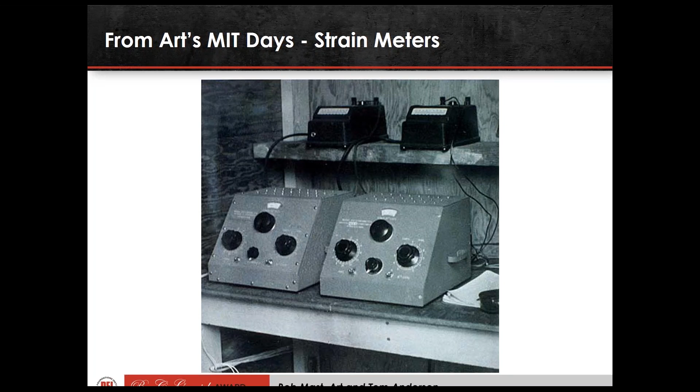In the late 40s, there was a project in Philadelphia for a new bridge overcrossing, and one of the firms that bid on it, Preload out of the UK, bid a pre-stressed concrete bridge. The City of Philadelphia said, that's not in the code, we don't know how that works, so you've got to do a full-scale test. And so Art was hired to do the instrumentation of this.

Many of the famous names, T.Y. Lin and others, in pre-stressed concrete were involved in this test. It was successful, showed what you could carry with pre-stressed girders. And today when you drive around Washington State, you see many, many of these.

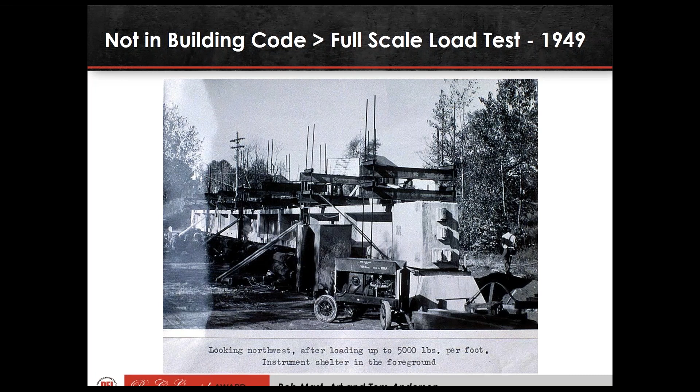But this was Art's first encounter with pre-stressed concrete, and he came back to Washington and started a firm. He started Concrete Engineering Company with his brother Tom in 1951, down on the Tacoma Tide Flats.

Interestingly, they were going to build a plant in Seattle. Seattle said, well, it's not in the building code, so you can't build that here. And so Tacoma said, well, you guys are the engineers, you do it. And so they founded Concrete Engineering Company, later known today as Concrete Technology Corporation.

But a year later, they spun off an engineering company, Anderson and Anderson. A few years later, Hal Birkeland, another one of the giant principals in this, joined the consultancy, and then Bob Mast joined in 1959. They had enough letters for a name, with two vowels that really worked well—ABAM Engineers.

From there, as they were applying this new material, Art was always the showman. When people would ask if you could do this, he'd say, well, let's ask the beam. Let's ask the concrete. So he'd build these things in the plant, instrument them, and show that indeed they would work.

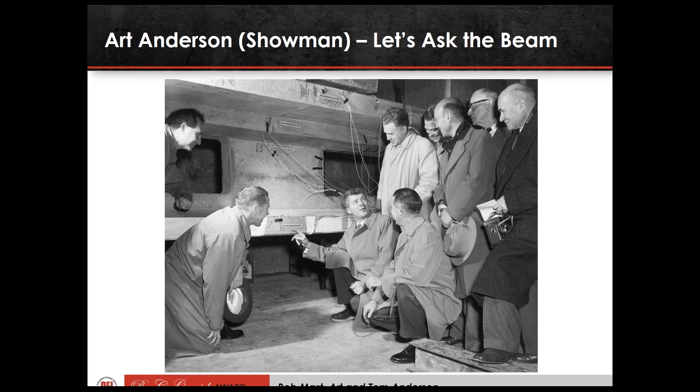A number of the innovations you've seen—this is a little broader than just marine foundations—include wide flange beams that are the WashDOT standard shapes now, and many other DOTs have adopted them, developed by these guys. The double T's, the deck bulb T's...

And Bob mentioned curved post-tension beams—I'll talk a little bit more about that in just a minute. Piles, pre-stressed concrete piles, hollow piles, and even an innovative technique, as Bob mentioned, for fabricating those.

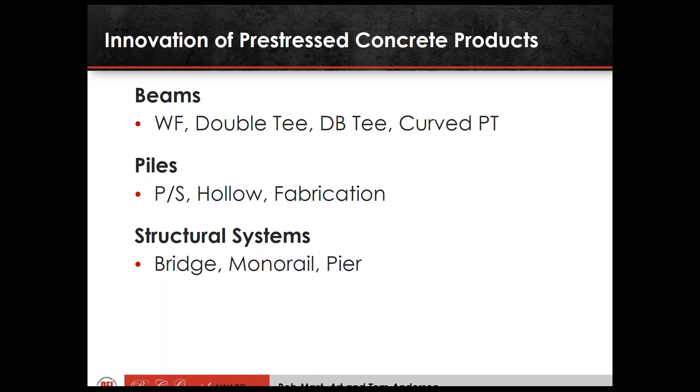Importantly, these guys were focused on the entire system. I think that's something that really bears a lot of credit—looking at the entire system of how this stuff works, not just the foundation, not just the substructure, not just the superstructure.

So they started by building a plant. They built their own pre-stressed building—this is a pre-stressed concrete moment frame, basically. You look at the cars, I think it's early 1970s, but the plant was built in '52. The building's still there, and many of the products you might know around Washington State were fabricated there.

One of the early things they did was the deck bulb T, came up with that concept. These were fabricated with a curb and the diaphragms all included, as you can see here. Some of the early uses of pre-stressed beams were on logging roads in the Cascades. Actually, these beams were quite a bit less valuable than large diameter old growth logs, so the Forest Service and timber companies were very interested in using these.

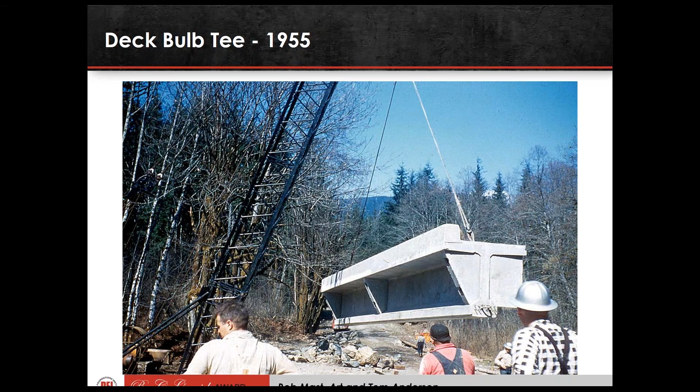Then enter pre-stressed concrete piling. This was an idea certainly relevant here in terms of marine foundations. A lot of people said this would not work, that if you pre-stressed the pile, driving it would destroy the concrete. Art was like, well, you know, you've seen this little Newton's cradle device where the clackers go back and forth—so he knew he had to reinforce for the reflective wave off the bottom of the pile, but he knew that it would work. They built a line to produce these things, and there are more pre-stressed concrete piles around here than you can count. They indeed do work.

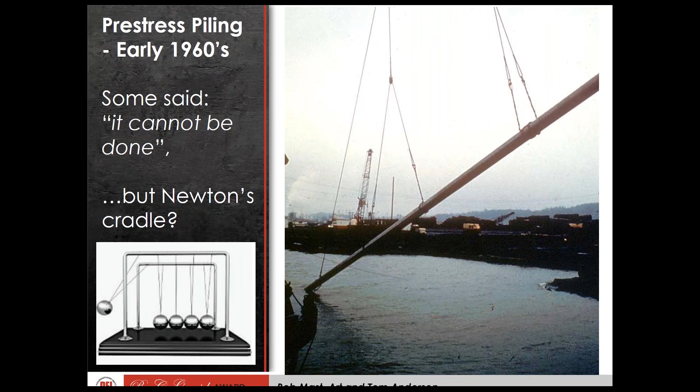Here was one of the early pre-stressed concrete systems—I've heard it called the Pacific Northwest Pier System. Compare that to California, where it's mostly cast-in-place superstructure. This is pre-stressed concrete piling with precast deck panels, and you see the haunch deck panels that were quite efficient within a cast-in-place cap.

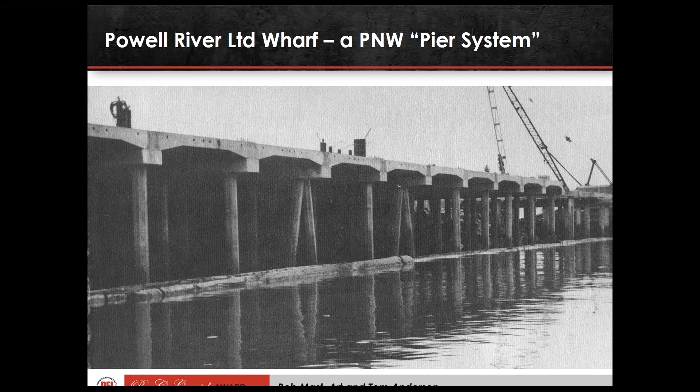Still using this kind of construction. It's evolved a bit to be sturdy enough for seismic loading. We don't use the batter piles anymore, but the system's still around.

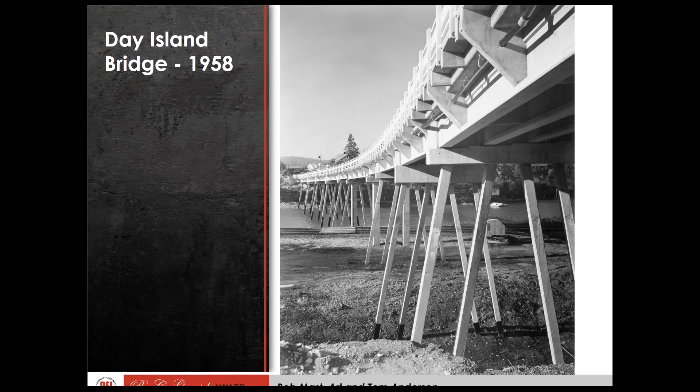Some bridges. This is the Day Island Bridge, 1958. You see the piles are pretty slender by today's standard, but this was the sort of thing you could do with pre-stress piling, unlike other, say, precast concrete piling that was around at the time. Pre-stress piling was much more efficient and certainly better for marine applications because of the control of cracking.

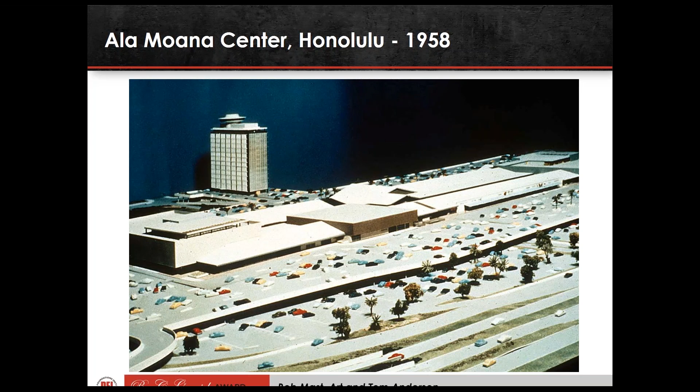Go to Hawaii, an early use of deep foundations. There was this two-story parking garage at the Ala Moana Center. You may have driven by it or shopped there in Honolulu. This is before BIM, so you see the little plastic car models and stuff - these are the tools of the day. But the idea was you drive piling and then cast a pile extension, and it was very efficient and quick, saved a contractor a lot of money.

They tried to negotiate a fee that was 10% of the savings. I don't think that worked out, but you know, you don't ask, don't get, right?

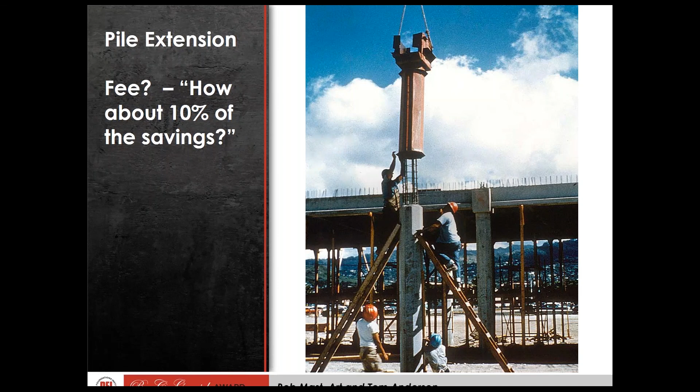Bob mentioned the Seattle monorail in 1962, and I understand some of you went to Space Needle last night, so maybe you rode on this system. But at the time, for ride quality on a monorail, you can't have straight beams, you need curved beams. This shows one of those curved beams being set in place, this post-tensioned beam.

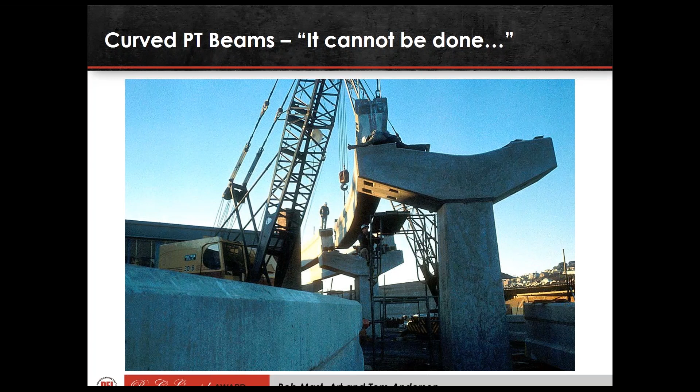This shows the erection of some of those piers, in '62 or late '61. It was a temporary structure. There are actually deep foundations beneath this, and the piers are bolted down to the top of this plinth. The idea was you could unbolt it and take it down - it was only meant to be temporary. And I think we can all attest it's still there, still operating, still a unique structure.

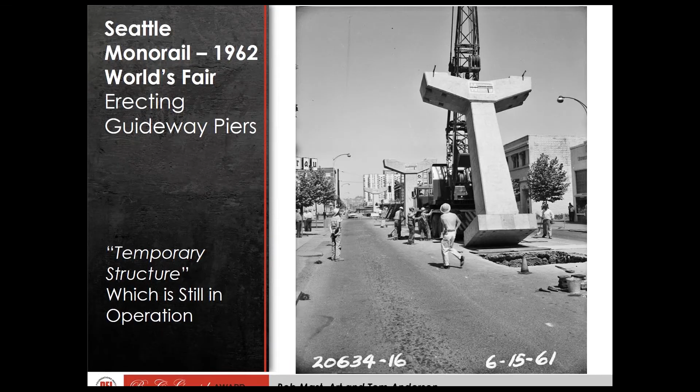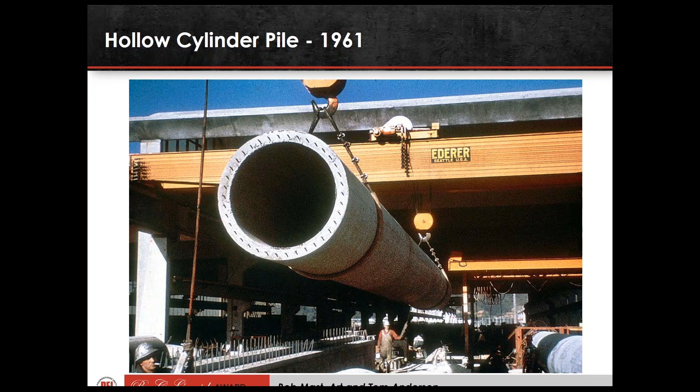Bob also mentioned hollow piles. This shows some of the hollow piling coming out of the plant. You can see the inner hollow element. The way this was done - you see this pre-stressed line to the right of the slide, it's a form that's open, and we're going to put concrete in, I'll show you how this works in just a second. You pull, you've got the pre-tensioning, then you pull a mandrel through the form as you pour the concrete. You can see one of the Seattle monorail beams off to the left there too.

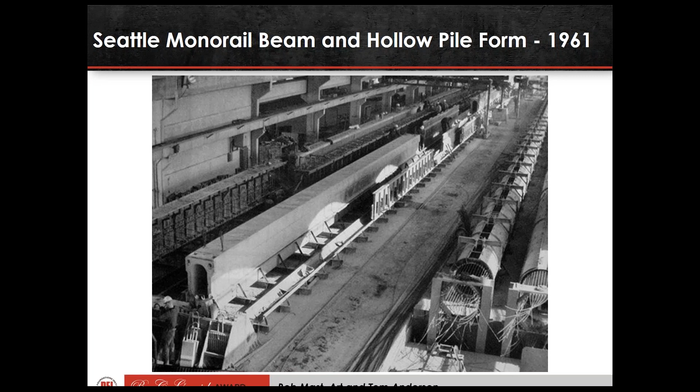So they were doing a lot of different things. One thing that fascinated me about this photo is you look around and there are a lot of the plant's pre-stressed concrete elements that these guys designed, built, and put up and said, look what we can do here. It's pretty cool.

This shows production of some of those hollow piles where the mandrel that Bob spoke of is being withdrawn as the concrete is placed - it's really low slump concrete. There are vibrators on the inside of the mandrel, and as that gets pulled out by basically just a tugger, the inner hole is formed in the hollow pile, so you don't have to go in and wreck out a form or leave stay-in-place forms.

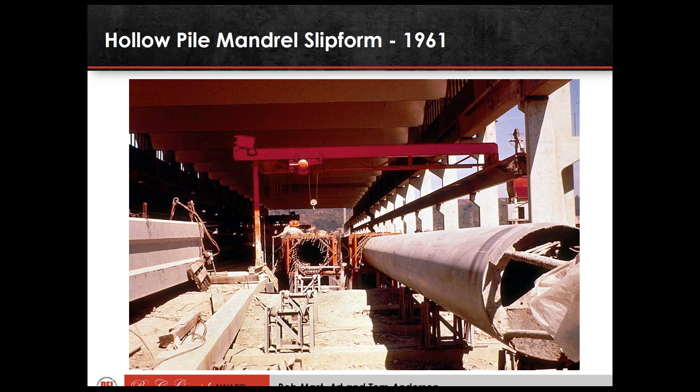If the tension in the cable got too high, you were going too slow. If it was too low, you're going too fast. You'll have problems, have to rebuild the pile. Having the right mix design, water content in the aggregate, all this stuff, pretty critical.

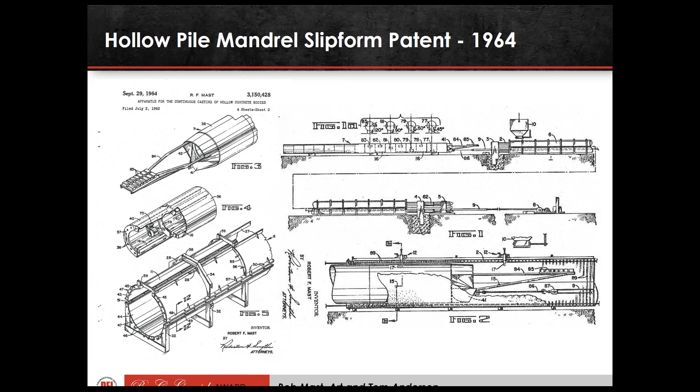They did a lot of testing to figure out how to make this work. My understanding is a lot of people tried to copy this, and I'm not sure anyone other than the Japanese were able to come up with a system that worked. I think Bob helped them with it. But it required a lot of grit, as we would call it today, of sticking with it to figure out the process. And of course, the advantage is they're easier to transport, they're lighter.

This enabled a lot of construction in the early 60s in the interstate program here. This is the Puyallup River Bridge, just south of Tacoma. Also, the approaches to the old 520 bridge and I-5 over Ravenna, just north of the U District here, were built using these. Of course, today we know there's some problems seismically with these, and we're retrofitting or taking some of these out. It was not known at the time, but this hollow pile did enable construction that was not otherwise very easy to do.

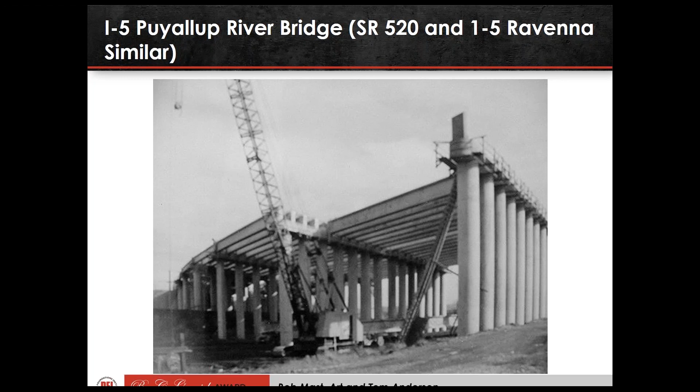Another interesting use of this same hollow pile technology many people are not aware of: Lake Washington was getting quite polluted with septic systems. So there was an interceptor sewer built just below the water level that the sewer systems now connect into and take the outfall to the sewage treatment plant. This is another use of the hollow piling, and actually what today we would call accelerated bridge construction. So you've got piling driven below the lake level, precast caps that were used, and then these were set on top and hooked together with, you can see, some of the square connecting pieces there in the middle foreground. So this was all done underwater.

So they're doing accelerated bridge construction underwater. I mean, who's doing that now? It's pretty cool. I would say these guys were remarkably innovative.

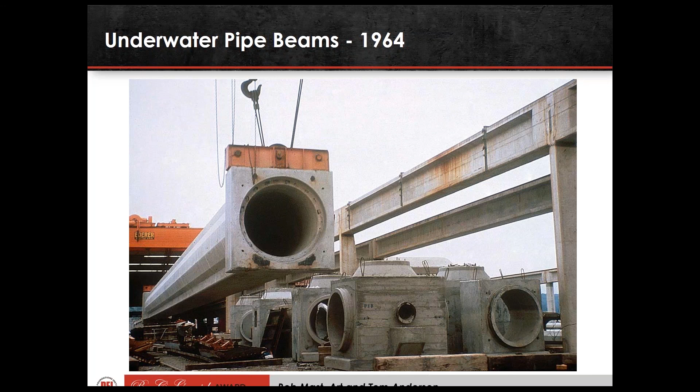Here's another use, replacement of a bridge at Scatter Creek. This is on Highway 410 down in Enumclaw, a little southeast of here, which had a washout from a huge flood event. You see the Highway 410 bridge in the background. The bridge in the foreground was Weyerhaeuser's haul road, which had been a railroad and replaced by trucks, and Weyerhaeuser liked to run their trucks way, way over load limit. So there was no way they were going to be out on the highway. So they had this parallel haul road.

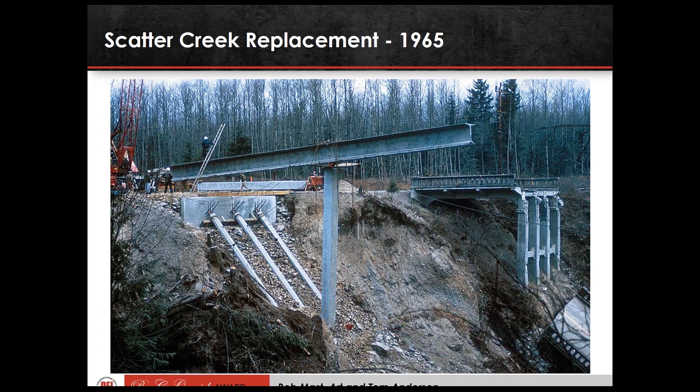Concrete Tech used, again, some of this piling technology, pre-stressed concrete piling. You can see the backstays that react the pier, which will pivot out. I'll show you another photo in just a second of a similar structure. This was replaced in 6 weeks from the time the bridge washed out, and the US 410 bridge took a year to replace. So Weyerhaeuser had their bridge and their haul road back in operation pretty quickly.

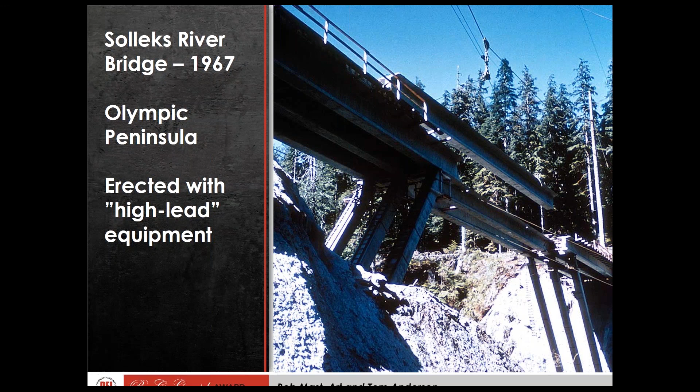Here's a similar type of structure with this canted leg approach. This was in some rock over on the Solleks River on the Olympic Peninsula. This bridge was erected not with the conventional cranes you drive up the forest roads, but high lead logging equipment. So the loggers were like, yeah, piles, concrete, wood, we don't care. You can see the high lead equipment in the middle upper part of the photograph.

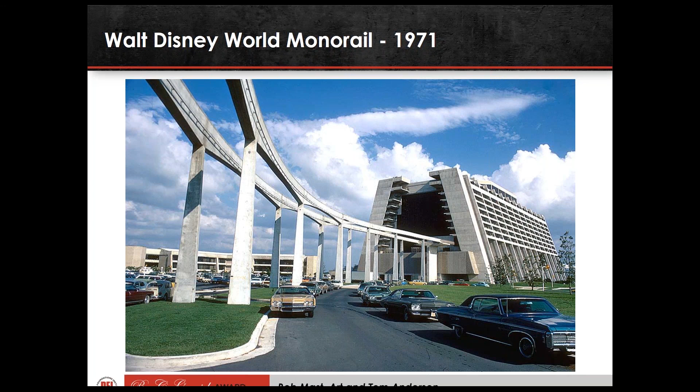Then eventually, in the late 60s, early 70s, Walt Disney World in Florida was built in Orlando. They wanted a monorail. They'd had a monorail down in Anaheim, which the curved pieces of that were normal reinforced concrete, and they sagged like crazy. So they wanted to use this curved beam technology, and that was used in Walt Disney World.

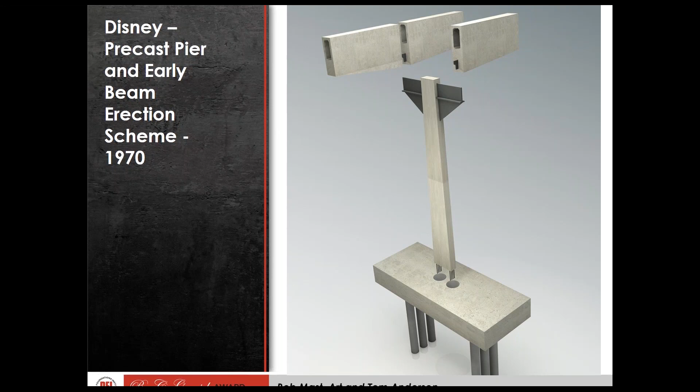This shows kind of a rendering of how that system went together with a double guideway at the top, hung off a steel torsion beam. This allows the girders to rotate at the end without putting load into the column. Again, this is accelerated bridge construction. See the deep foundations below, and this was a cast-in-place cap, but the column was grouted into that cap.

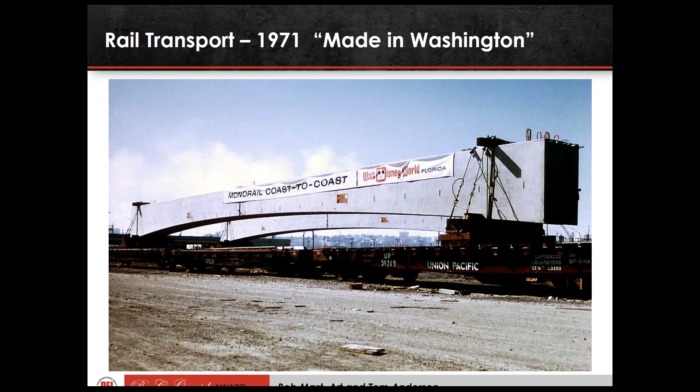This was all made in Washington. Nobody could build those beams except for, at that time, Concrete Tech. So every one of the beams in the original Walt Disney World system, the Magic Kingdom, were shipped all the way across the country by rail.

A little bit later in the 80s, another use of pre-stressed concrete piling. This was to lightly pre-stress the concrete, so sort of partially pre-stressed concrete, and you could load it laterally. You didn't yield the strand, and it would pop right back.

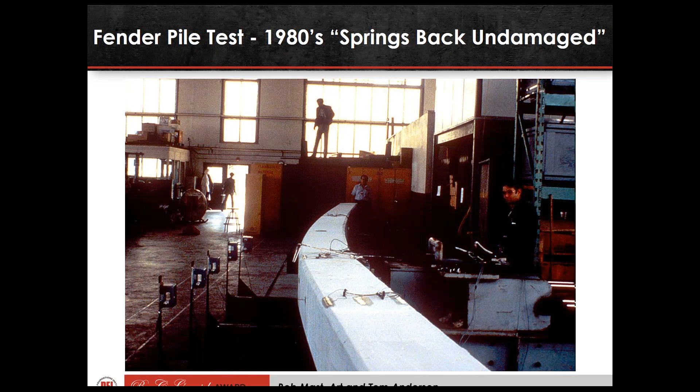So this became a replacement for timber fender piling in a lot of our marine structures. Timber fender piles have a problem of deteriorating, getting the walers broken by impact, that sort of thing. And so many of the more heavy-duty piers now, both commercial and Navy, use this pre-stressed fender pile concept. Still in use today. This was just the brainchild of these same guys - how can we use pre-stressed concrete a little differently?

And it's amazing when they come up with the idea of what they can put together. If we design engineers had come up with this, they probably would have told us 100 times you can't do that. But remember how I started the presentation here - yeah, maybe you can do it.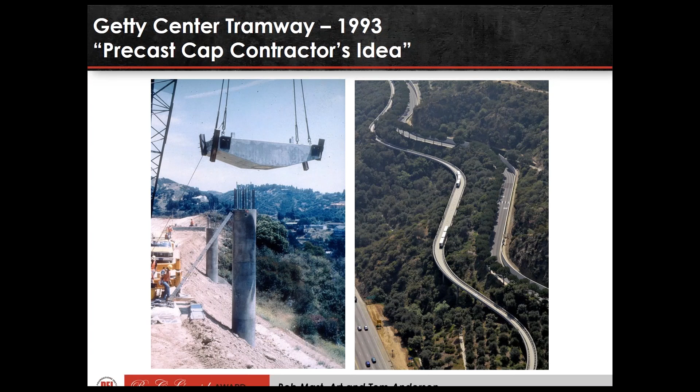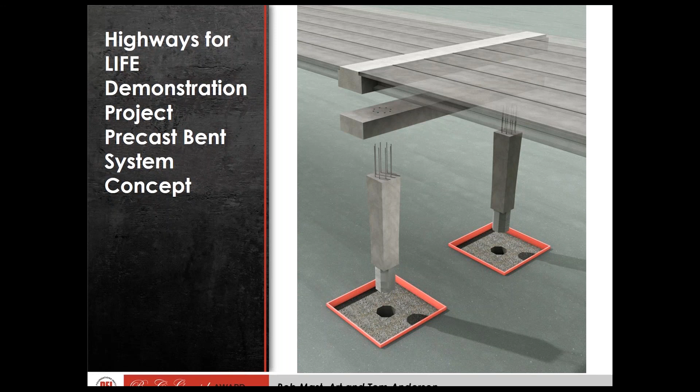And even today, this was a more recent project we were involved with, Highways for Life, a federal highways project for a complete precast bent system for high seismic regions. WashDOT built a demonstration bridge using this concept down on I-5 south of Olympia. These columns have been used in some other bridges over by Microsoft, and we've extended this to deep foundations again.

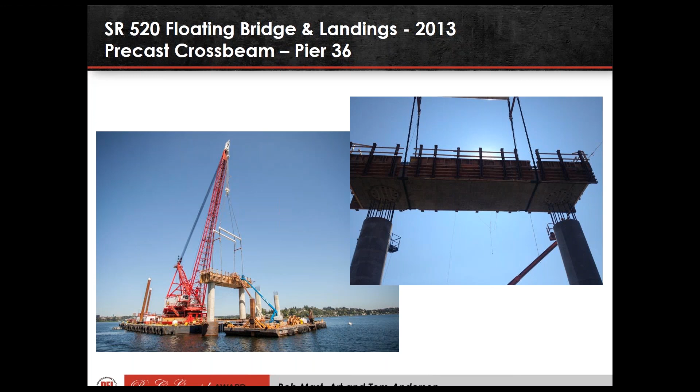This is the 520 bridge. This is the bent that supports a transition span to the floating structure, precast bent on the drill shafts that they used for the 520 replacement. And then finally, this is just a rendering of a bridge that replaced the old bridge over the mouth of the Cedar River at the Boeing Renton plant.

So every 737 that rolls out of that plant, and I know they're kind of stacking up right now, but every one that rolls out of that plant goes over this bridge. So there was a definitive notion that they wanted this bridge replaced quickly. So this uses the precast bent concept, and those precast columns I showed you in the previous slide now married up with drill shafts that we had tested at the University of Washington, showed this works.

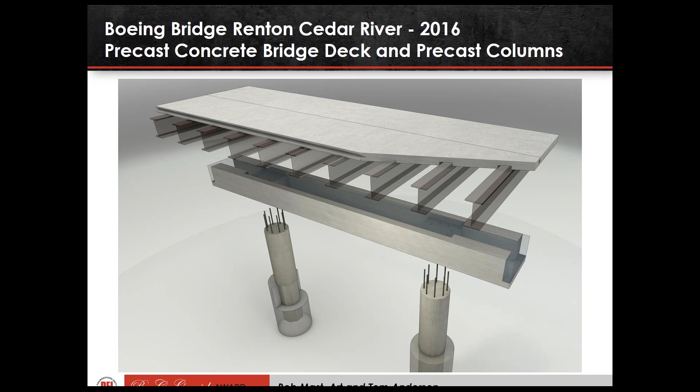And so the conclusion here, just this quick tour of the 60 years and the legacy of Art and Tom and Bob and even Hal Birkeland, is that it was an innovative concept, pre-stressed concrete to start with. Today, it is a workhorse of our infrastructure - marine, transportation, building, you name it. It's cost effective, has really good quality control, and as long as we're putting our brains to it and continue to solve some of the problems that invariably come up, we are forging ahead with some really nicely innovative things in the industry.

So I would offer that innovation fits really nicely with the Ben Gerwick Award and the concept behind that award. And so on behalf of all the principals of the original ABAM, the two Anderson brothers, Art and Tom, Bob Mast and Hal Birkeland, I thank you for your attention.

Okay, so I think Lee did a good job of getting across the innovativeness coming from the Andersons. Just want everyone to realize Bob's family, the Mast family, is sitting here in the front row - his lovely wife Marilyn and the rest of the gang, and they're all here to cheer him on.

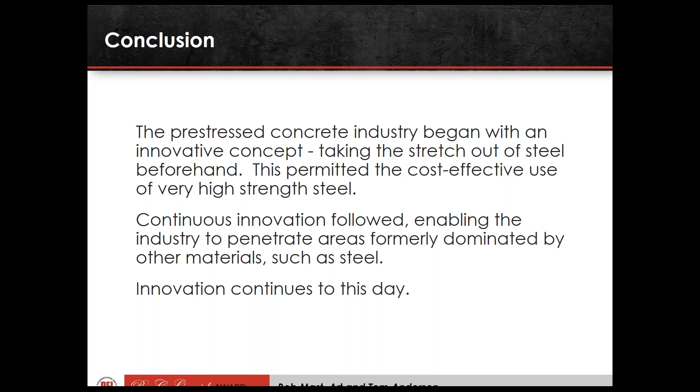Okay. Take another photo. Okay.